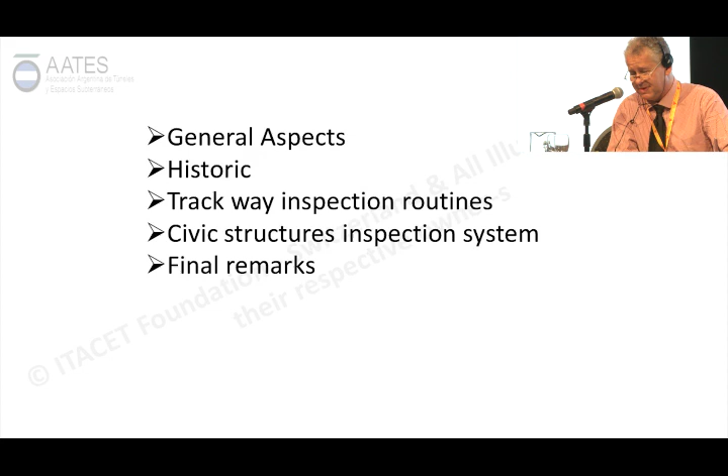I speak about lines of Metro São Paulo. I will speak about general aspects, the history of our development of projects, trackway inspection routines used in São Paulo Metro, the civil structures inspection system, and final remarks.

The subway line enterprise is very complex and comprehends the conception, design, construction, operation, maintenance, recovery. And economic evaluation and the global cost is very important along the life of the line. In construction phase, the decisions will have a big impact in the operation phase.

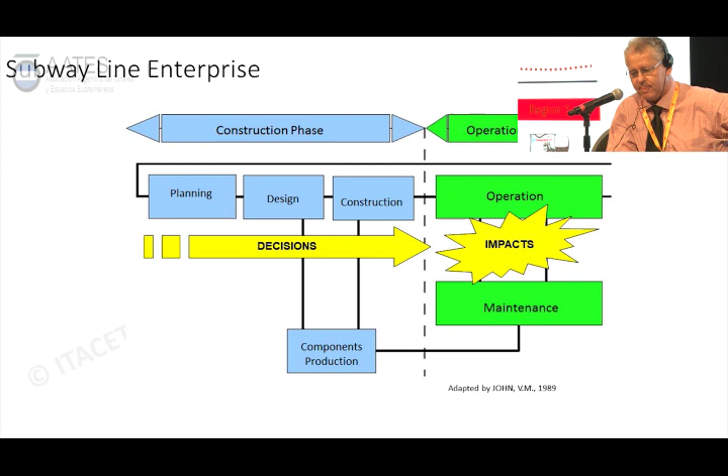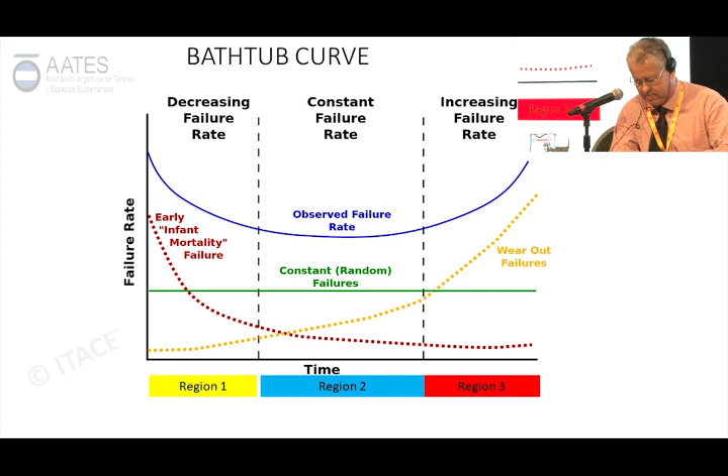This picture shows a study by Amberg from Switzerland, indicating the main problems in tunnels are humidity and water entry along the life. This statistical analysis of pathologies covered a lot of tunnels, 1,710 kilometers in Switzerland, indicating the main problems related to humidity and water entry.

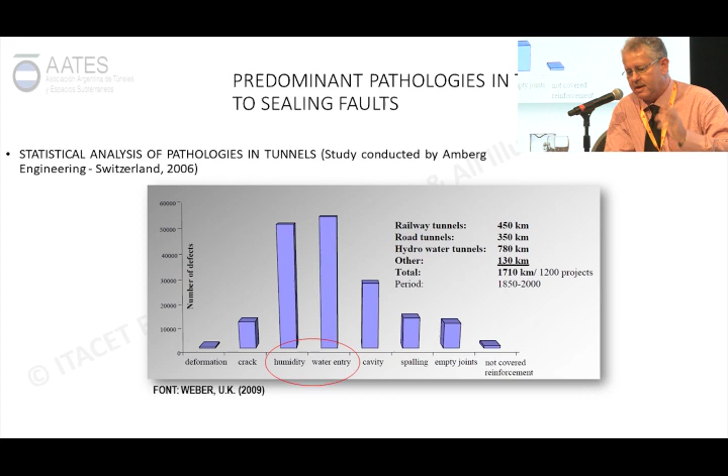In São Paulo, we have now 5 lines in operation. We have line 4, but line 4 now is privatized, and we don't have data about the maintenance of this line. But line 1 began operation in 1974, we have 50 years, more or less, of operation, 23 stations. Line 2 has operated since 1991, line 3 since 1979, and line 5 since 2002.

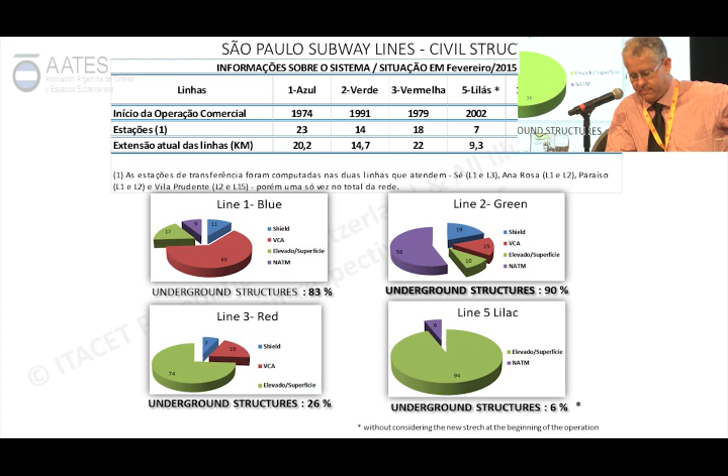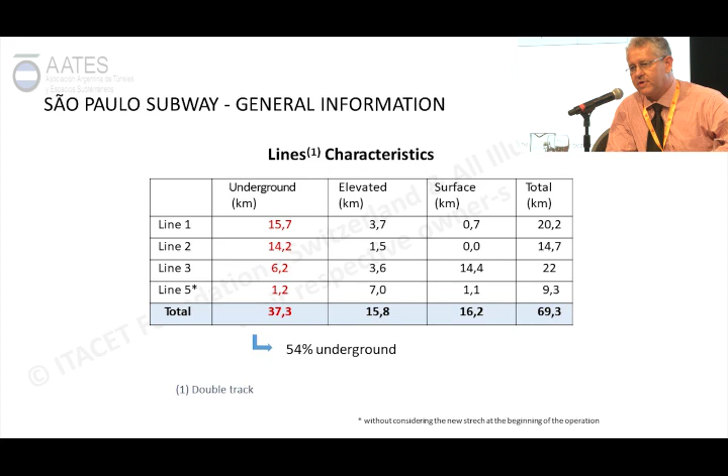Most of the lines are underground, in tunnel or cut and cover. This picture shows the underground stretch: line 1, 16 kilometers, line 2, 14 kilometers, line 3, 6 kilometers, line 5, 1.2 kilometers. We are now beginning the operation of all of line 5, but we don't have new data. And 54% of the lines are underground.

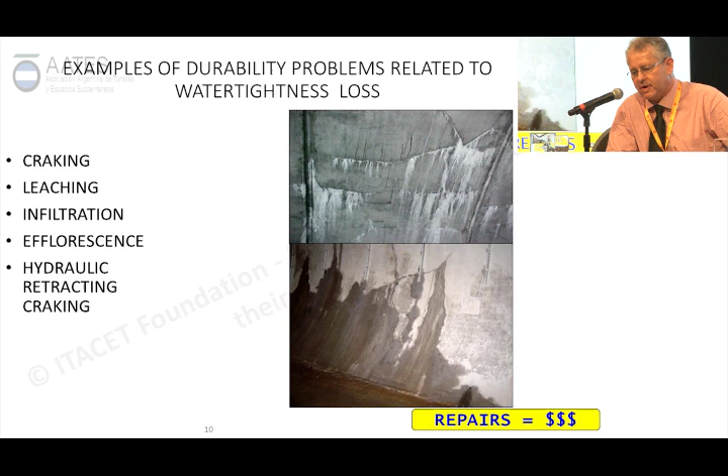But we have a lot of examples of problems of durability, especially related to watertightness or loss of watertightness. Cracking, leaching, infiltrations, efflorescence, hydraulic retraction, damaging of electrical and mechanical equipment, damage in the tray, damage in track and fixations, false occupation.

False occupation is a very serious problem in lines of São Paulo Metro, because we are transporting 4 million people a day. If one train stops the operation, we have a lot of problems on platforms, on the stairs, and others. And if water stays on the track, our system indicates a train stopped in this position, a false occupation. We call this situation the ghost train.

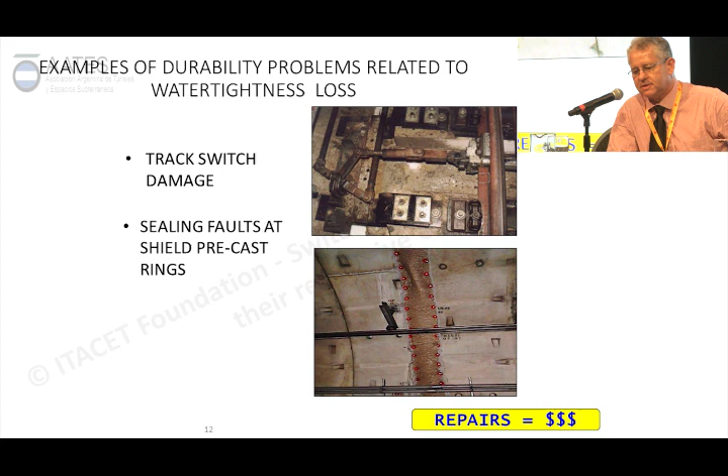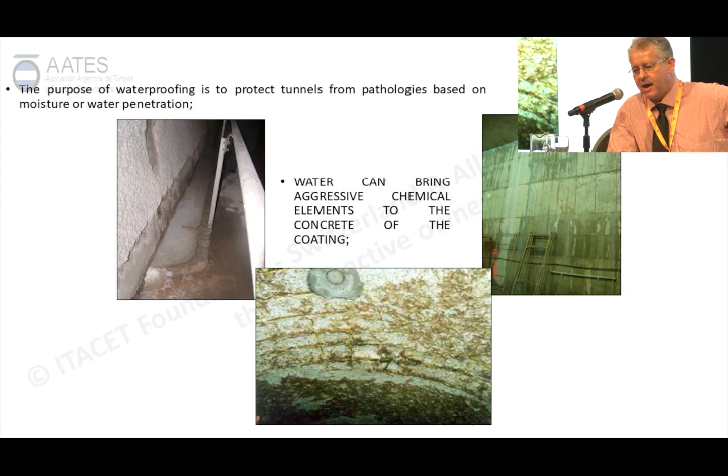Other problems: track switch damages, problems of sealing at the shield precast rings, environmental problems, problems of health, fungi, paint, sensory discomfort of users, aesthetic aspects, and others, aggressive water in concrete, chemical attack in structures.

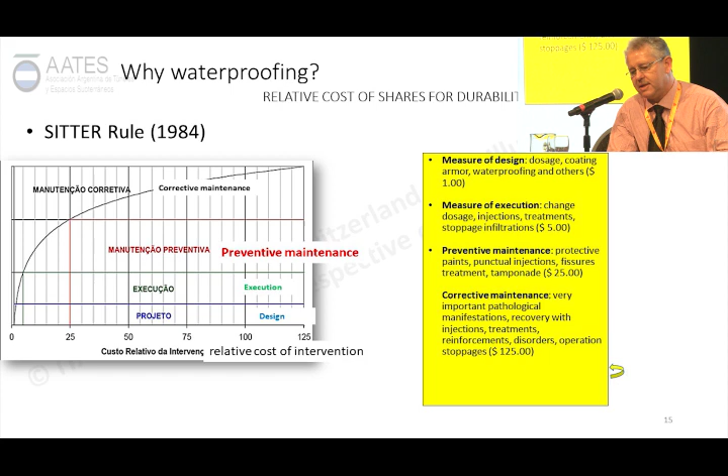And we have in mind now Sitter's rule. Sitter's rule says if you use one money in the design period, you can avoid using 5 monies in execution, or 25 monies in maintenance, or 125 monies in corrective maintenance. From this point of view, it's better to use money in the design period or execution, because in the end of the life of the tunnel, we will spend a lot of money.

This is one example of maintenance costs. In these cases, line 2, line 3, line 5, over 7 years: 15,000 liters of preparation and injection of special polyurethane resin for temporary sealing. Preparation and injection of polyurethane resin for final sealing, 43,000 liters, very, very expensive. Preparation and injection of polymeric acrylic gel, 30,000 liters. These costs are paid by the user, not by the construction.

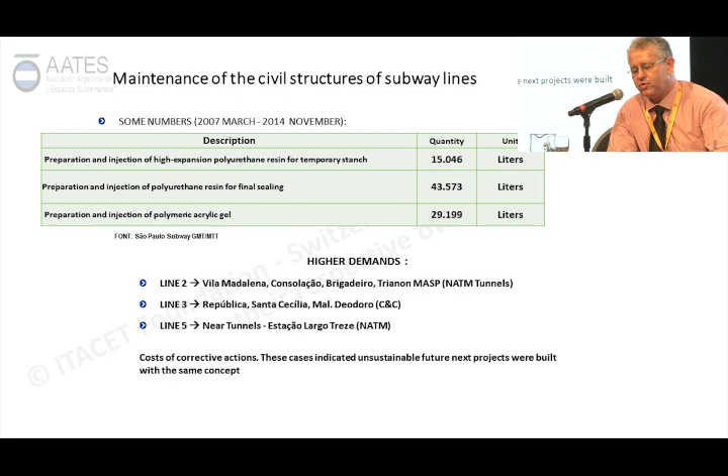We now prefer to spend money in design so as not to be in this situation. This is the graphic by Mehta. Mehta is a very important concrete specialist. This graphic indicates the problems in the concrete life, the problems with water in cracks, loss of mass of the concrete, problems in the reinforcement, corrosion.

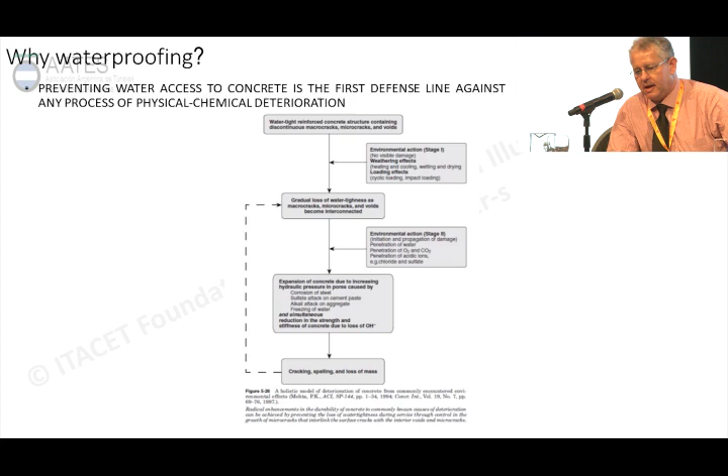And the cost of waterproofing to prevent this kind of problems in São Paulo today is this order of money. In line 5, the waterproofing is 8.7% of the cost of concrete, all the concrete of the line. And waterproofing related to all the work of the line, 3.8%. And in line 2, the waterproofing cost 7.1% related to concrete, and 2.8% related to all the work.

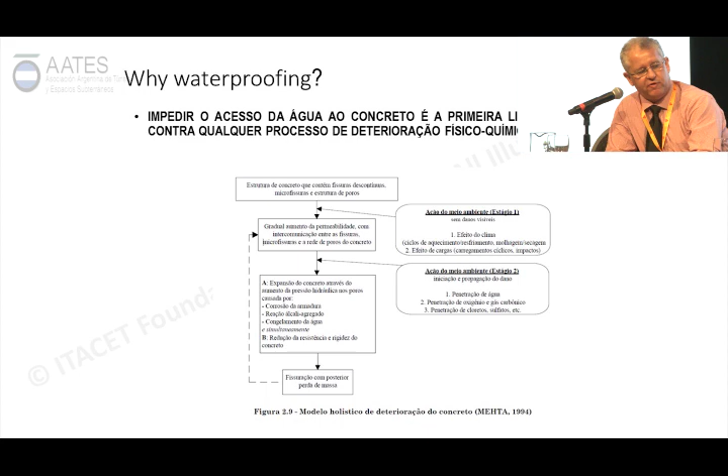If you have in mind Sitter's rule, this is 1 to 5. If we don't use this philosophy in the project, we will use 5 times more in maintenance or recuperation of the lines.

The problems of waterproofing in the world: our data indicate the first uses in the 60s using reinforced fiberglass, and flexible membranes were used in polypropylene textiles and polymers in Switzerland and Austria. And in 1983, NATM in Washington, using flexible membrane with a big success. And after this, a lot of works around the world are using flexible membranes.

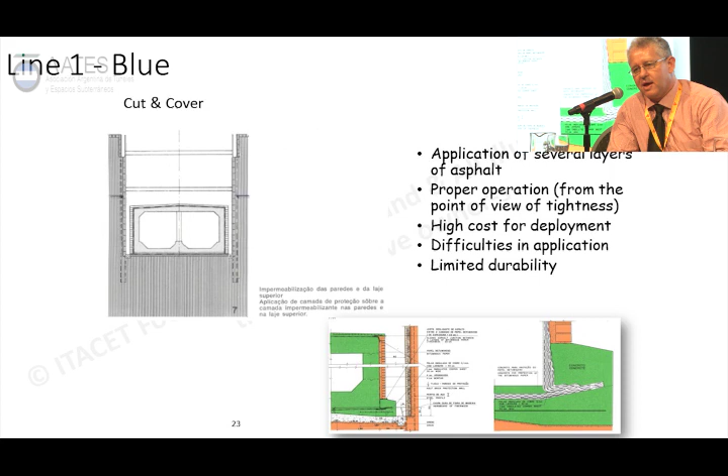But in São Paulo, our waterproofing systems in lines, the first line in the 70s, we used only layers of asphalt. A big 7 layers, asphalt, geotextile, asphalt, geotextile, high cost of deployment, difficulties of application, limited durability. These pictures indicate the sequence of construction of waterproofing in line 1. The success of this option is not very good because a lot of these tunnels are under the water table. It's difficult to indicate this is a good solution. And around the world it is now a very old solution.

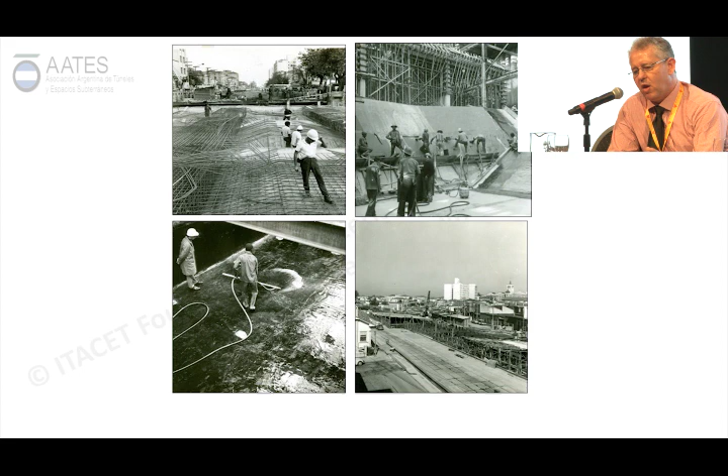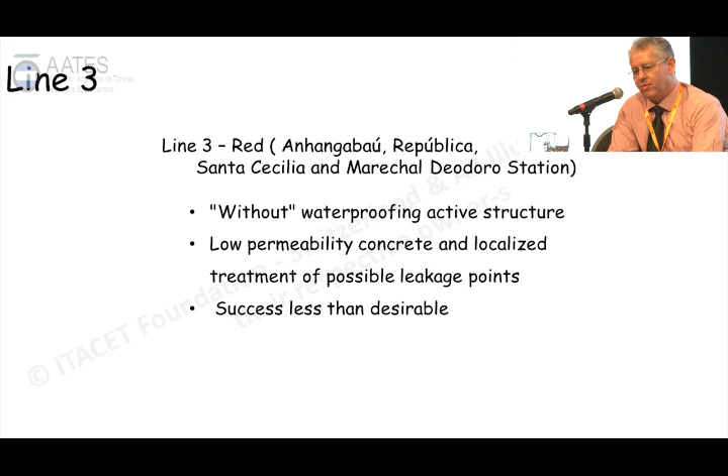Application very, very difficult. In the 80s, in line 3, a new philosophy in São Paulo Metro, low permeability concrete. In this case, used in stations Anhangabaú, República, Santa Cecília, Marechal, and the others, without waterproofing, active structure, low permeability concrete, and localized treatment of possible leakage points. Success less than desirable. A lot of problems.

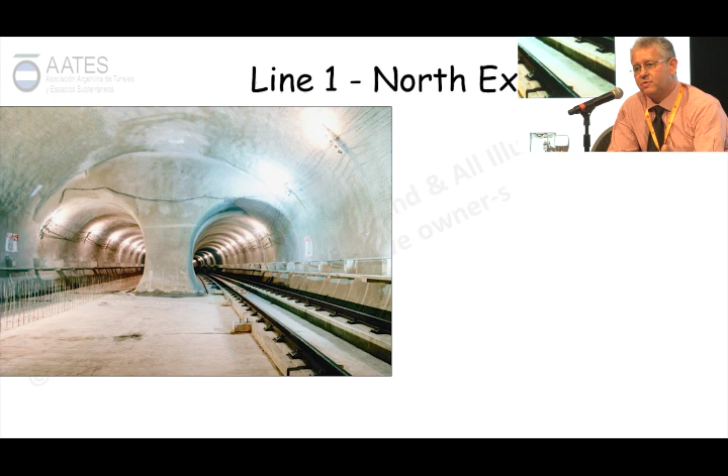In Marechal Deodoro Station, this tunnel is an NATM tunnel with 2 shotcrete layers and without waterproofing. Partial success in these conditions, because in this tunnel the mass is a very good clay without water. But in other stretches, a lot of water in the tunnel. One important view of this option is that we construct with low permeability concrete. The concrete is impermeable between the cracks. That is the important thing. In the cracks, the water flows into the tunnel. Impossible in our situation, our technology.

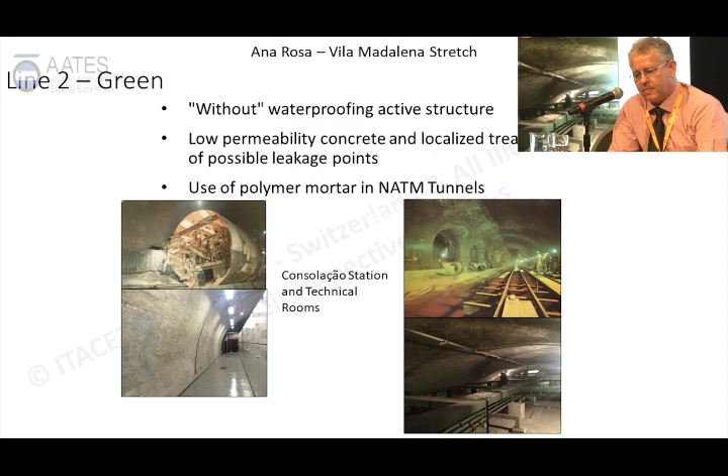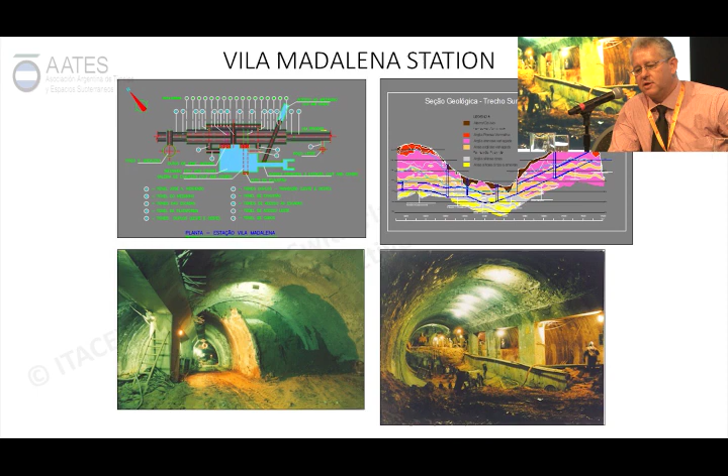But the climax of the bad situation of waterproofing was in Vila Madalena Station. Vila Madalena Station was constructed by the NATM method in a very variable geology with layers of sandy clay, in the top right of the picture, and 3 different levels of water table. Like now, we had a lot of stopped works. This tunnel was stopped for 6 years with a big shaft connecting all the water tables. And the construction of this station was without waterproofing, using low permeability concrete.

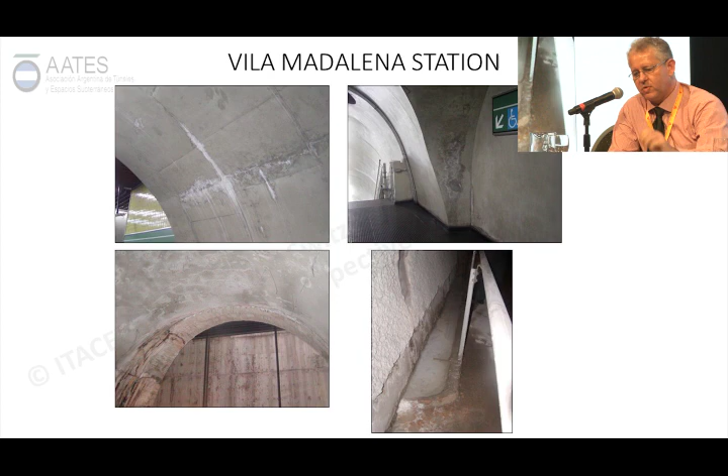A lot of problems. We had problems with the public ministry, processes in justice, a lot. Serious problems of leakage and others. In the picture you can see a lot of situations. The pathologies: infiltration in retraction cracks and thermal cracks, infiltration in concrete joints, infiltration in concrete failures, nests and voids, the dissolution by hydrocarbon of asphaltic membrane in contact with line 1.

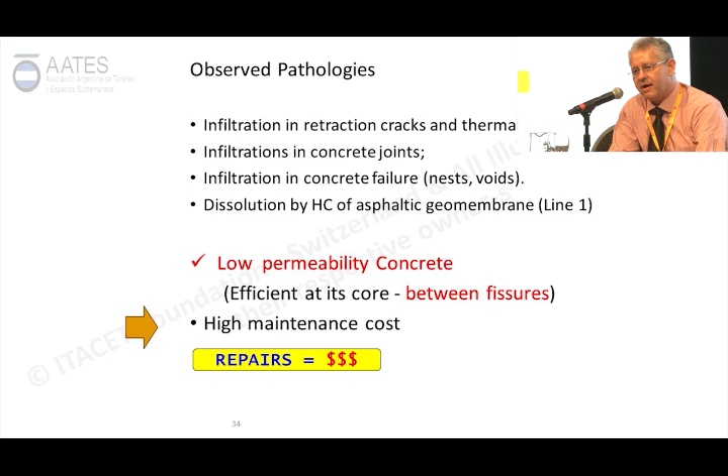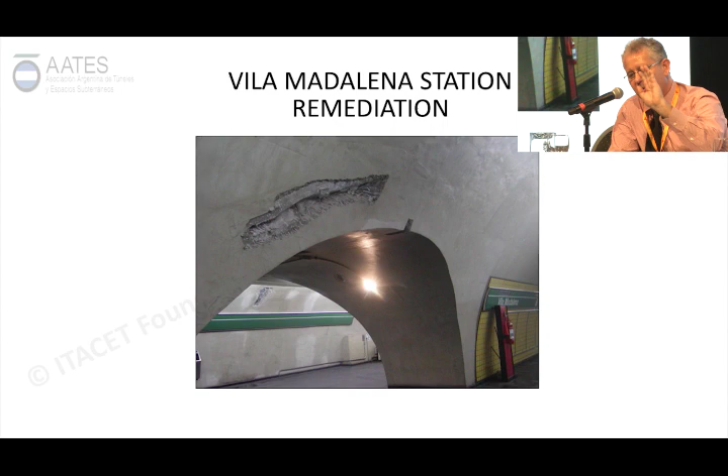In summary, low permeability concrete is efficient between fissures, and the repairs are very, very expensive. This is a repair of the Vila Madalena station. It's similar to an odontological situation. You need to open your tooth and use polymeric mass. This is the situation. But after the problem, we had a good situation, but every year new cracks are showing.

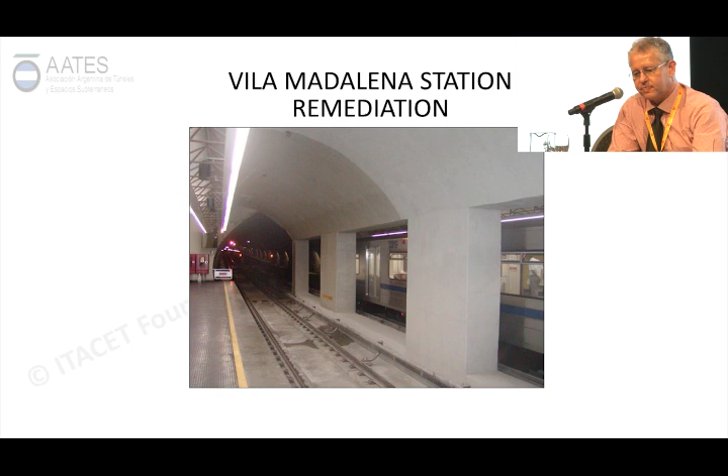In the 2000s, we changed the ideas. Now we are using waterproofing. This is the first use of waterproofing. In this period, the indication is SIA 280.

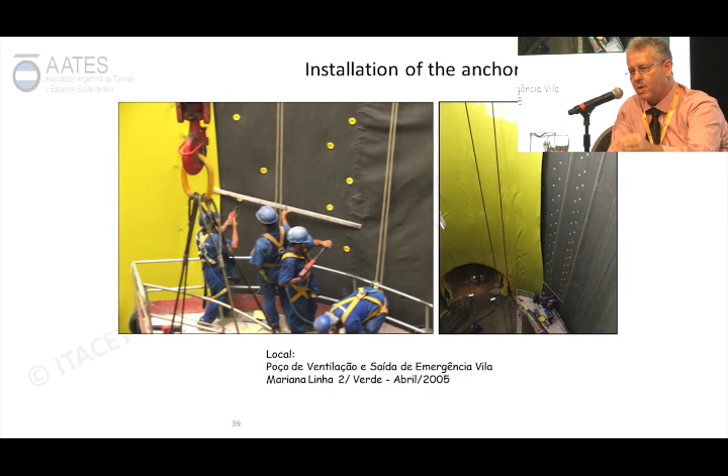218, Switzerland norm. This shaft was waterproofed by a group from Switzerland, the first utilization of this. This is a shaft with PVC membrane, 2 millimeters, using water bars, double welding, testing the depression in the welding.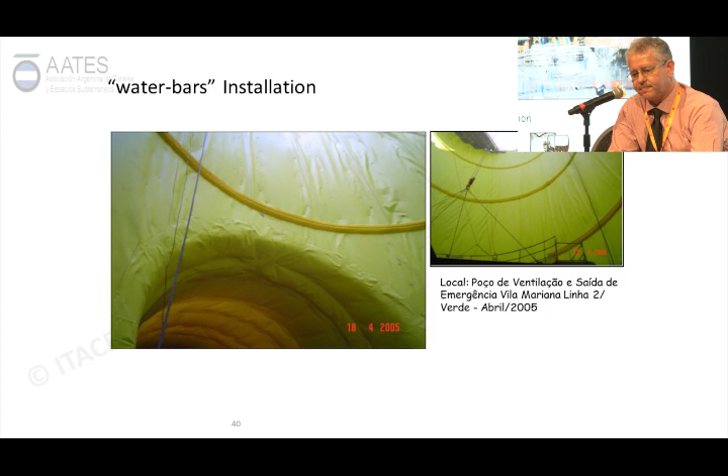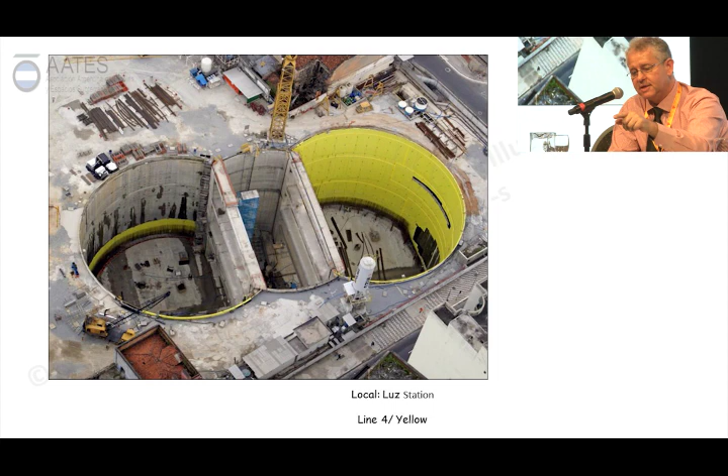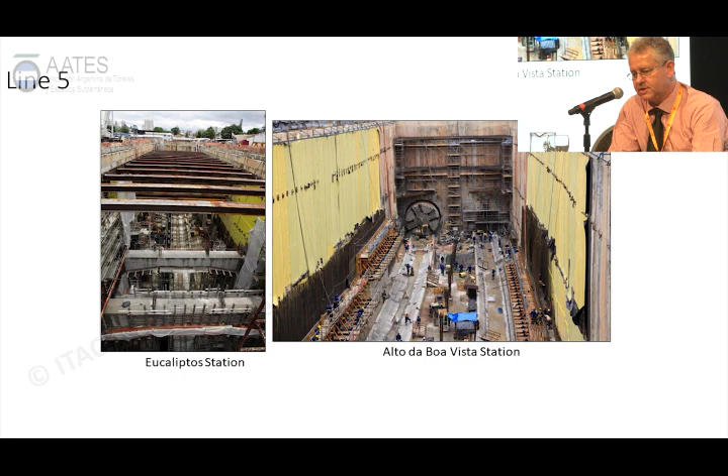This is station Luz, line 4, all sandy, without one part of clay. Water, we had 70 wells through dewatering to construct the station, and use, in this case, 3 millimeters PVC membrane. Now, in line 5, we are using, in all projects, PVC membrane. This is line 5, new projects.

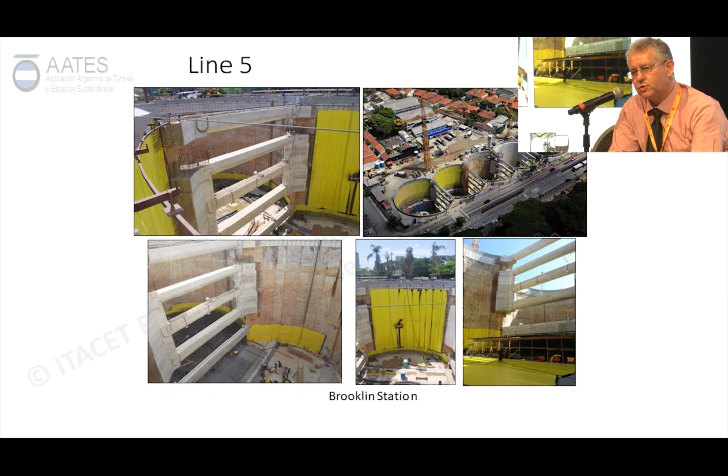The construction of station Brooklin. This station is a special station for us because it's an application of 5 shafts. Constructed at the same time, all the shafts using diaphragm walls and hydrofraise in this case.

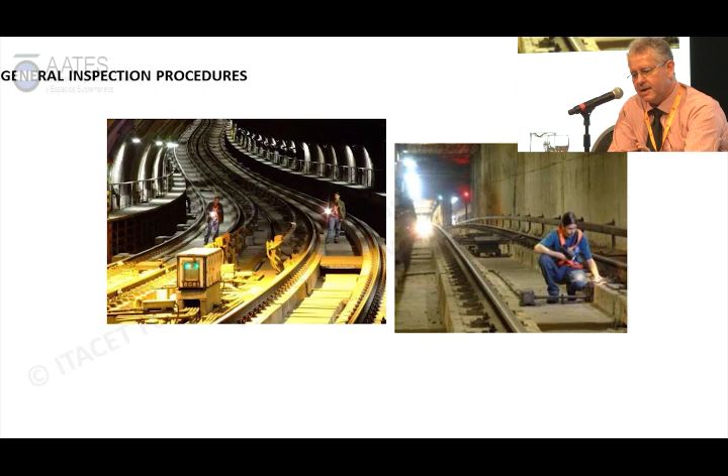But in the phase of the operation, because our company constructs and operates the lines, we have very specific procedures for inspection. I had help from the maintenance group of the metro. And the maintenance, a lot of things. One, track.

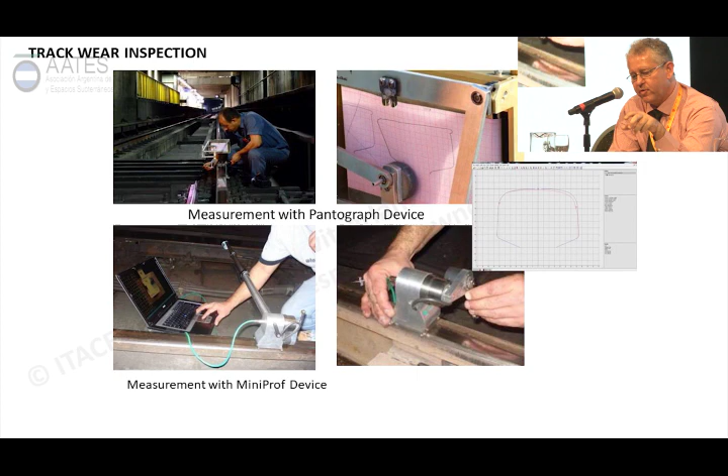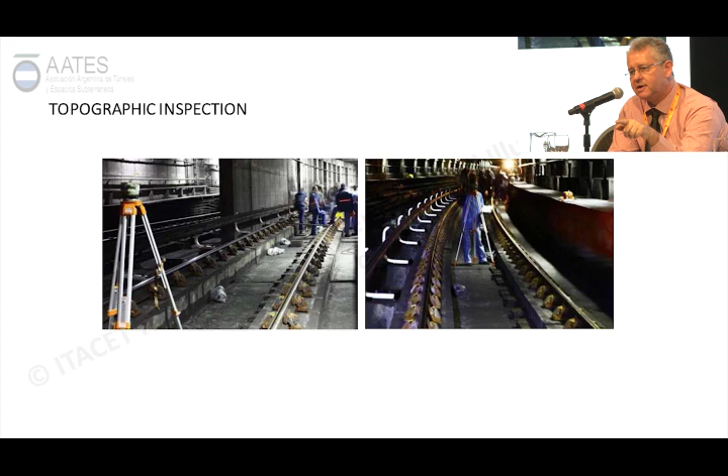Systematic inspection in tracks. The wear of the tracks, using pantograph system, measure with MiniProf device, topographic inspection in all the lines, in special lines where we are constructing new tunnels under the lines. Leakage current inspection is a serious problem. We had problems in corroded fixations, and in the buildings around it. If we have a lot of leakage current, we had problems around our line.

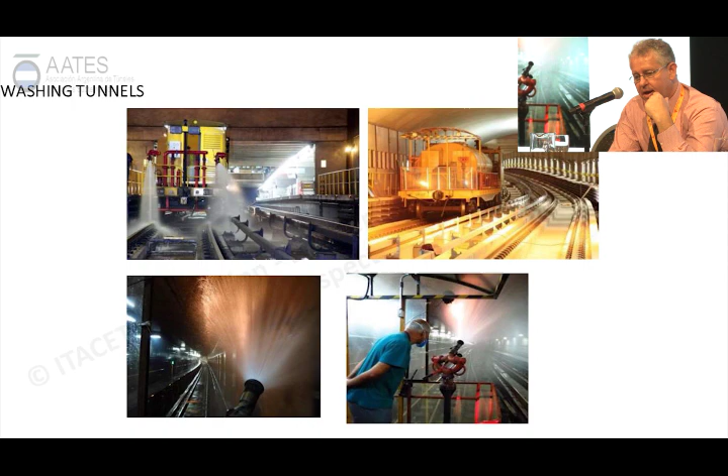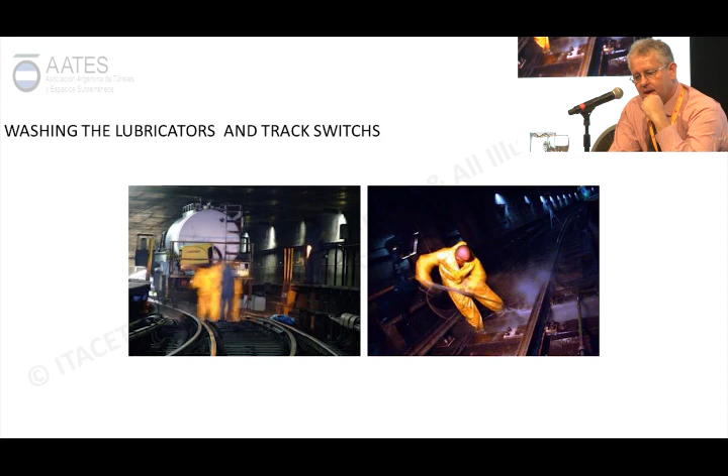Ultrasonic inspection in tracks, general inspection and cleaning, washing the tunnels using underground water, where in the old lines we have points with a lot of water. We are using this water for washing the tunnels. Lubricators in the track switches, track lubricators, systematic inspections, grinding rails in all the lines periodically, and in some special points we have problems in the rails. In this case, we change the rails and grind the rails.

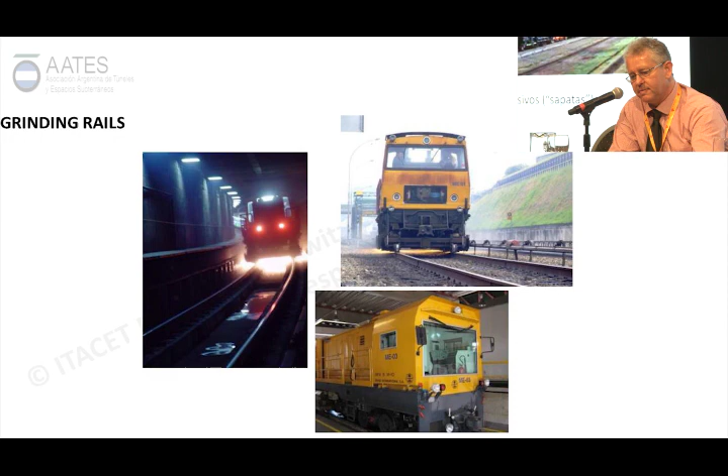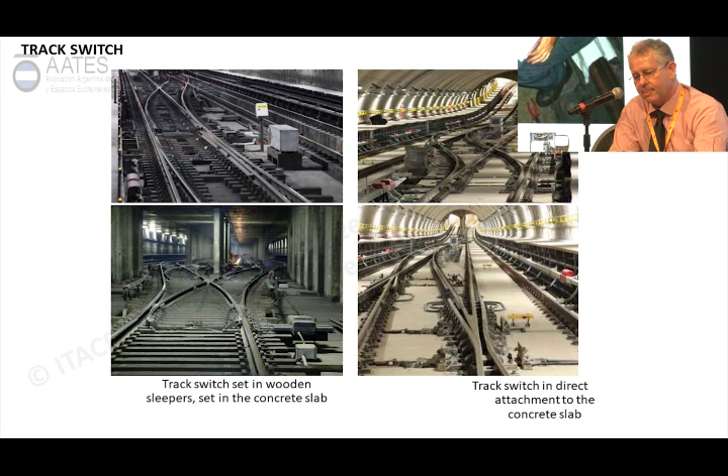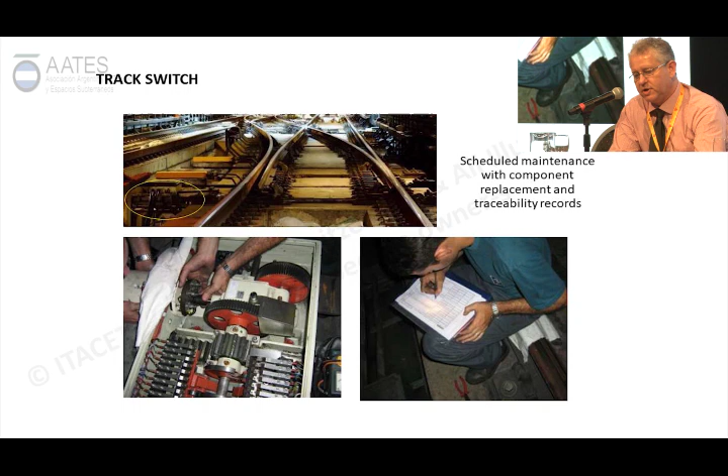Track switches, we have track switches in wooden sleepers or directly on concrete. Now we are changing all the wooden sleepers to concrete sleepers. But it is a very important point to maintain. Scheduled maintenance with component replacement and traceability records, especially in the track switches. Special systematic inspection of track switches and monitoring of track switches.

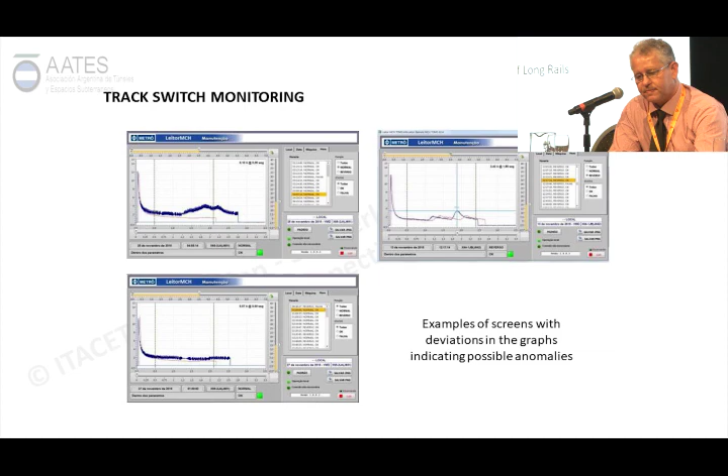All this monitoring is very important because if one train stopped in the platform with 2,000 people, it's chaos in São Paulo, chaos. Welding rails using fusion, changing rails, transport of the rails in the tunnels, rails exchange, aluminothermic welding.

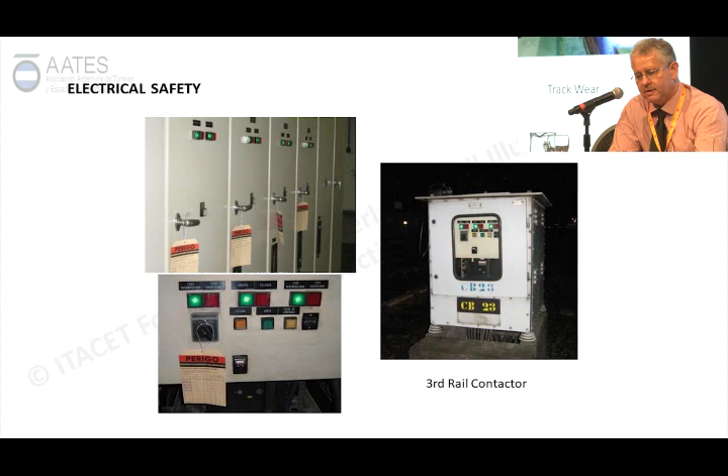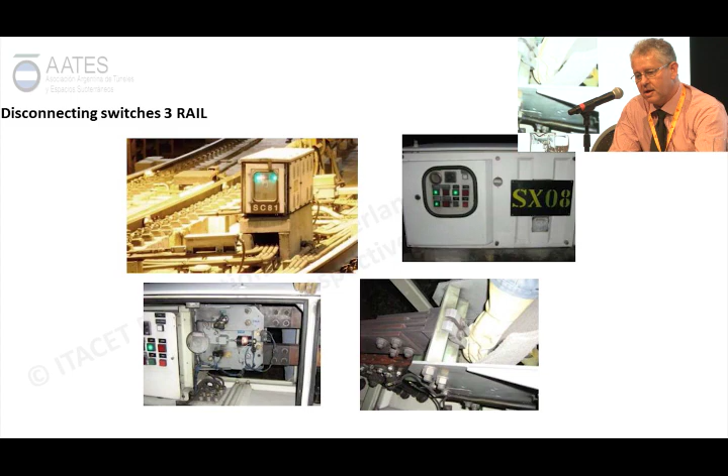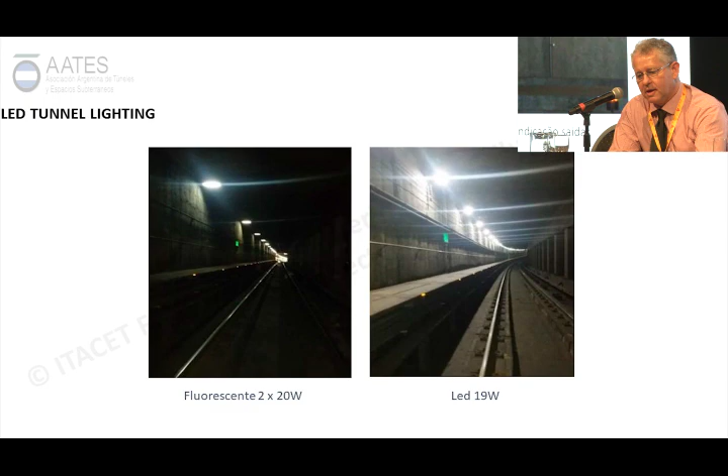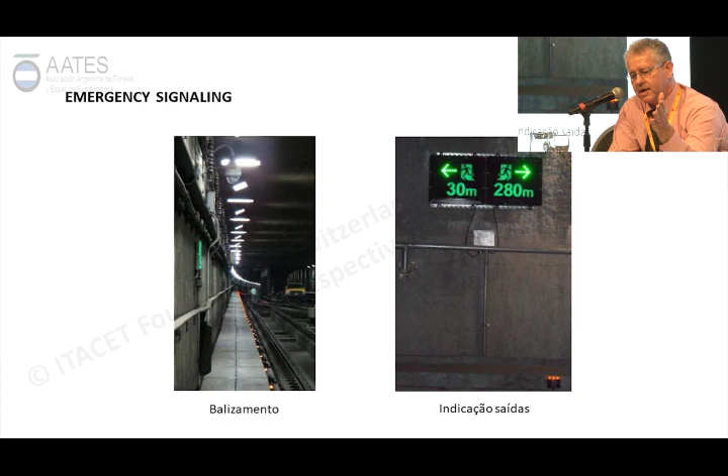Electrical safety, inspection of the third rail of electrical supply, disconnect switch of the third rail, lamps of maintenance in the tunnel. Now we are changing all the lamps to LED, lighting in LED. We have emergency signaling in all the tunnels, indicating the emergency exit and the marking of the tracks. Emergency signaling.

It's a very important point for us, noise vibration attenuation. The first problem we had was in MASP, Museu de Arte de São Paulo, because the trains induced a vibration in the concert room of the museum. During a chamber concert with violoncello, the vibration of the train. Beginning with this situation, we needed to change all the fixation systems where needed.

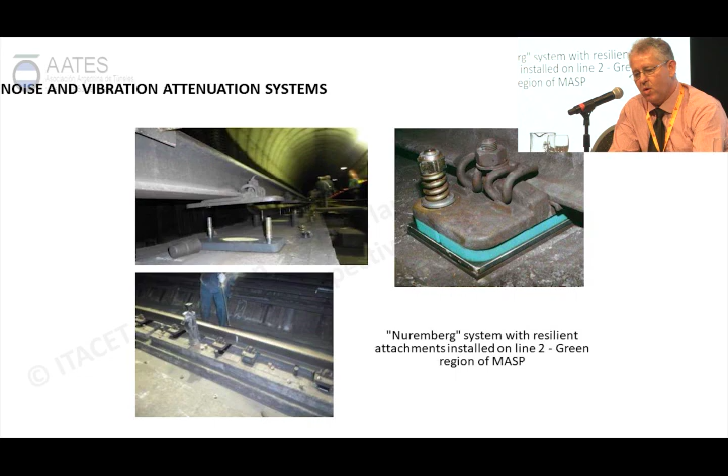This is a special kind of noise vibration fixation. It's a mass spring system with helical springs. It's called isodampers. This is for frequency 5 Hertz. It's the most expensive and is the best system for noise vibration.

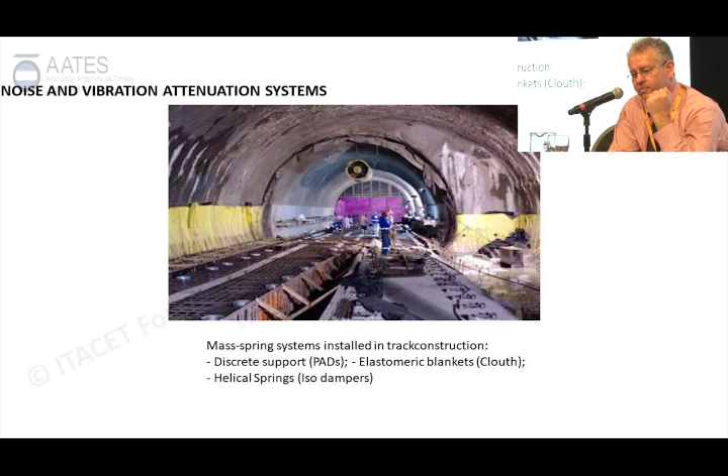The structural reliability of São Paulo Metro: the subway facility must present a level of structural reliability compatible with network operation responsibility. The main basic prioritization must always be the minimization of structural problems, detected by visual inspection, which may compromise the stability of the installations, the good efficiency of the equipment, and above all, the safety and physical integrity of users and the employees of the subway.

In summary, the basic prioritization of the civil maintenance service related to operation basically refers to: guarantee of full operation of the trackway, operation of the network without affecting the so-called carousel, the São Paulo Metro operating carousel, the integrated flow of the train operating network, continuous power supply of the metro network, ensuring full and sufficient signaling during the commercial operation, guarantee of operation of the user access system, box office, collection, and the locks.

This is the flux of the inspection in the trackways and the structure of the tunnels. This maintenance is civil maintenance, only in finishing elements, structures, corrective maintenance, infiltration treatments, failure of waterproofing, and anomalies in concrete.

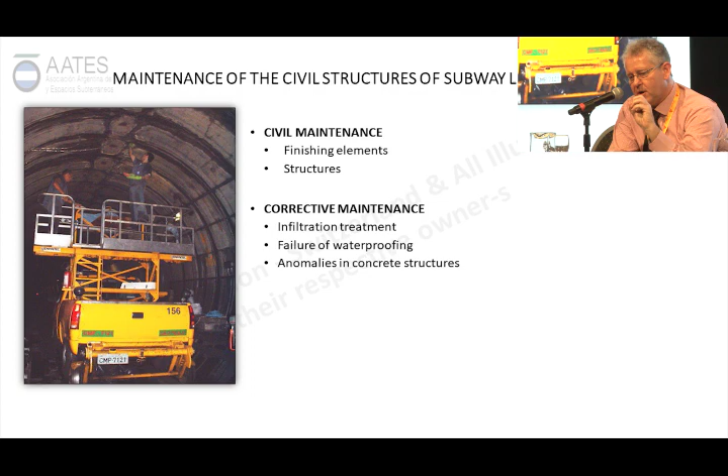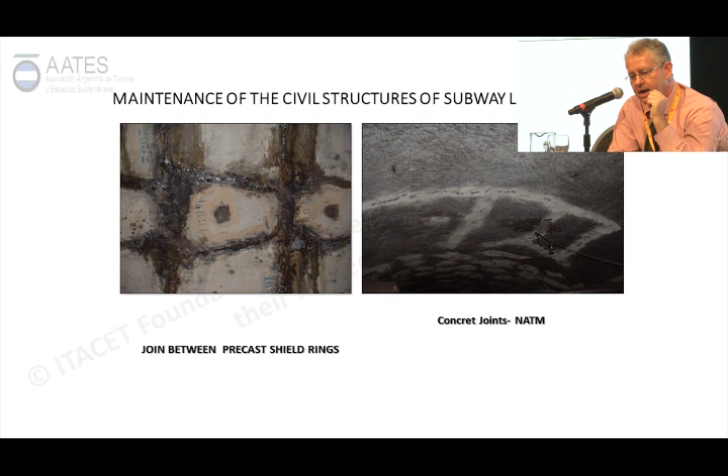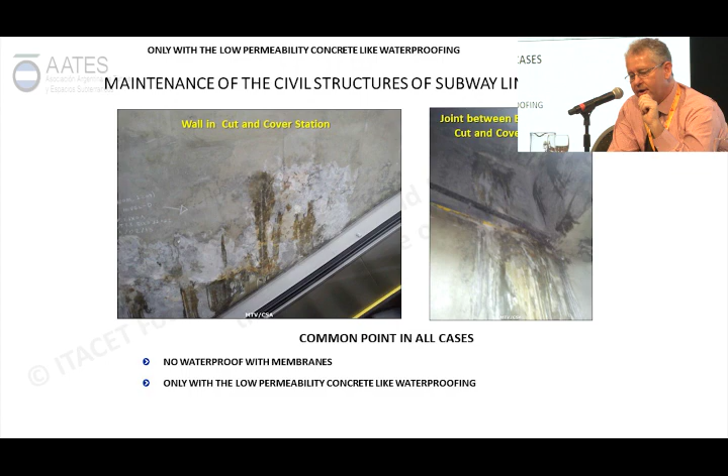We have the track vehicles to promote this maintenance. The cracks, concrete borders, joints of rings, concrete joints in NATM, problems in walls in cut and cover stations, joints beam wall in cut and cover stations. Common point of all these problems: no waterproofing with membrane in these cases, only with low permeability concrete as waterproofing.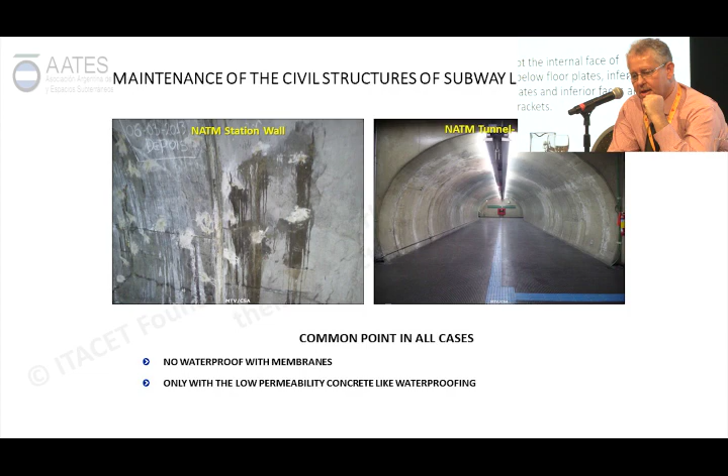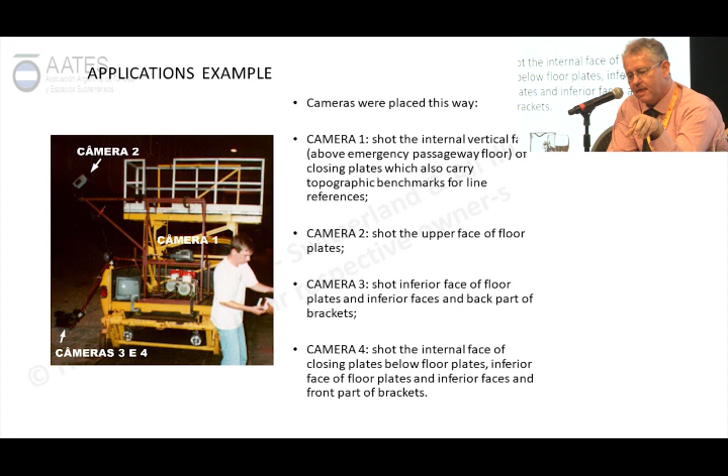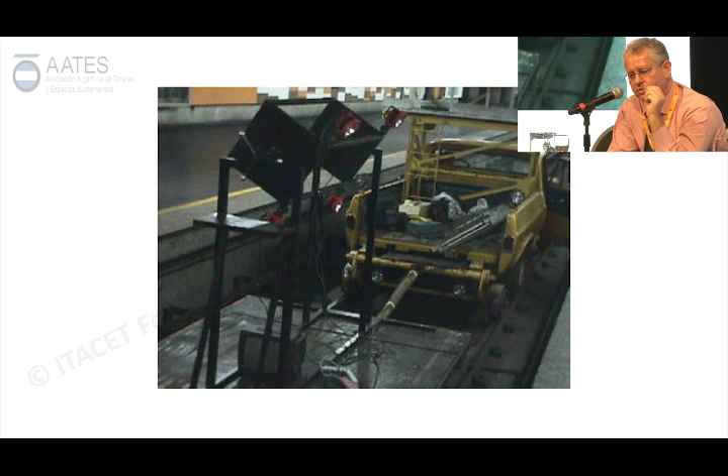NATM wall, NATM station, the same problems. We developed a system to study and hierarchize the problems using cameras in vehicles, in tracks, filming all the structures, the tracks, the walls, the tunnels.

And it was filmed, and we create a special sheet. This case is sheet of the emergency way. All emergency way is precast concrete. And we have tunnels with 40 years, and we need to inspect all the plates, all the plates.

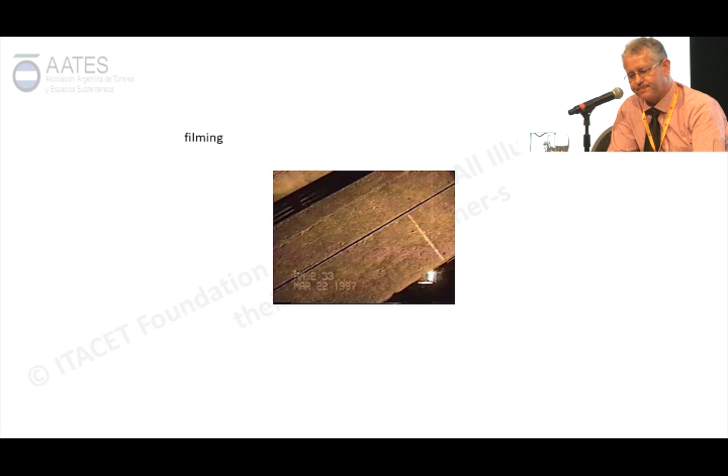We using filming, and after this, classificate kinds of plates with problems: big problems, small problems, and or changing the plates. In this case, infiltration in the superior photo and photo without problems down.

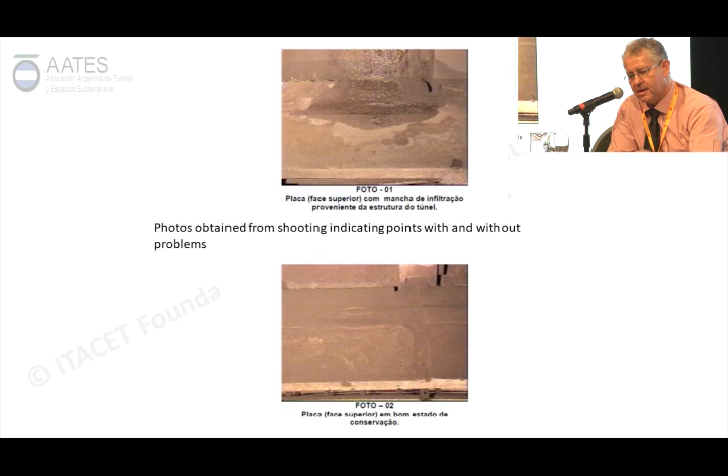The following figure shows the result of the evaluation of the conservation status through the assessment of notes of the steps in the decision-making process of maintenance floor plates. It's an example of emergency way, and the surface of the elevated tracks of subway, floor plate surface, walls, and highways.

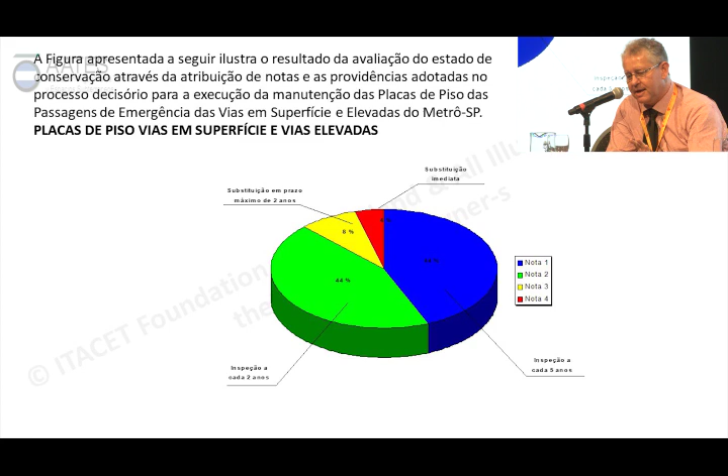The finding of this study indicated part of the plates need inspection in less than 5 years, other part inspection in 2 years. Substitution of 8% of the plates in 2 years, and 4% immediate substitution.

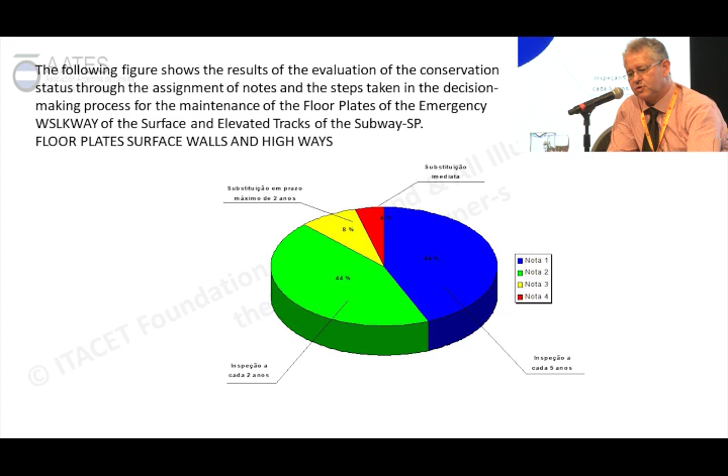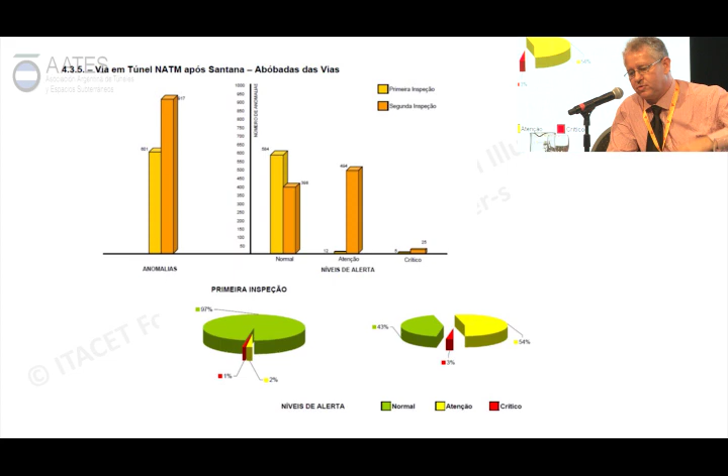90%, 97% normal in first inspection. In second inspection, normal 43%. The problems are growing during the years.

The resume of this, the abstract of this, is in stations. For example, Station Santana is an elevated station, Carandiru elevated, Tietê, and the others.

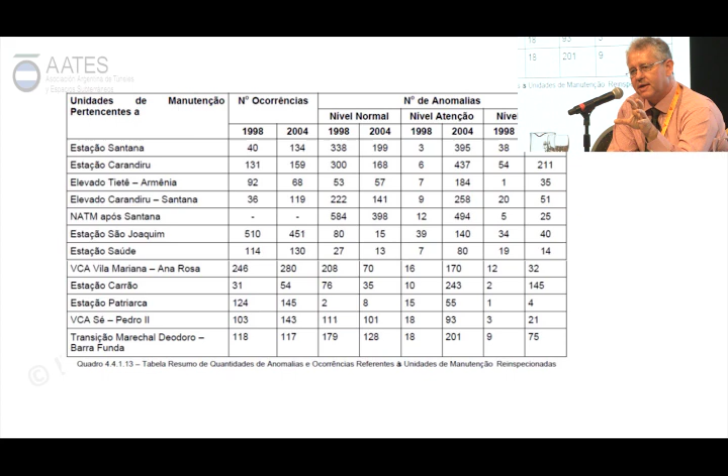The main problem is the stations elevated or at level, we have more problems than underground stations because the rain, the acid attack of the rain, the atmospheric attacks. More or less 20% of the problems was in underground structure, but 80% of the problems is in level or elevated structures.

Conclusion of this study: in view of all the situations investigated, it is noted that some structures present deterioration process more accelerated than others. The structures exposed directly to the action of weathering and mainly rainwater present great evolution of the quantity.

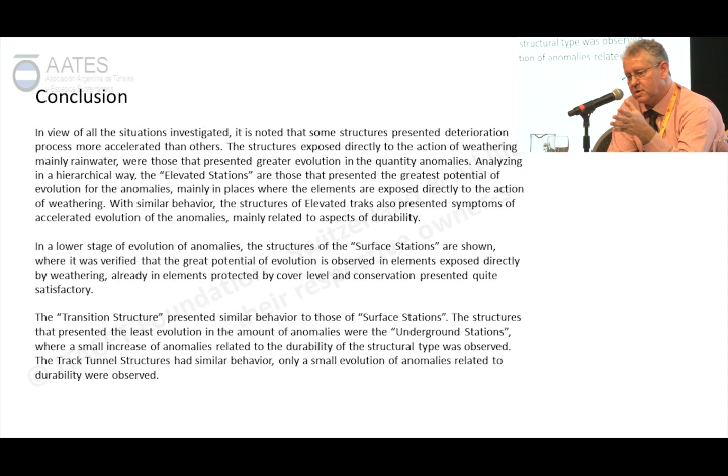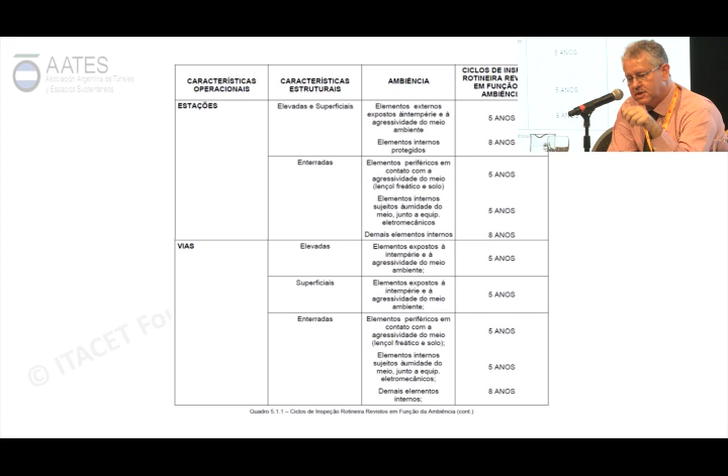In abstract, this table indicates stations, elevated, underground, surfaces, and cycles of inspection necessary after the system of control. Cycles of inspection of routine, in some cases 5 years, 8 years, depends on the kind of structure.

Closing inspection line 5 and 2, we used waterproofing in all stretch of tunnels. Our design action, I mean a durability of 100 years, and returning to the Sitter rule. If we are using one in design phase, we...

We use 125 in the maintenance phase.

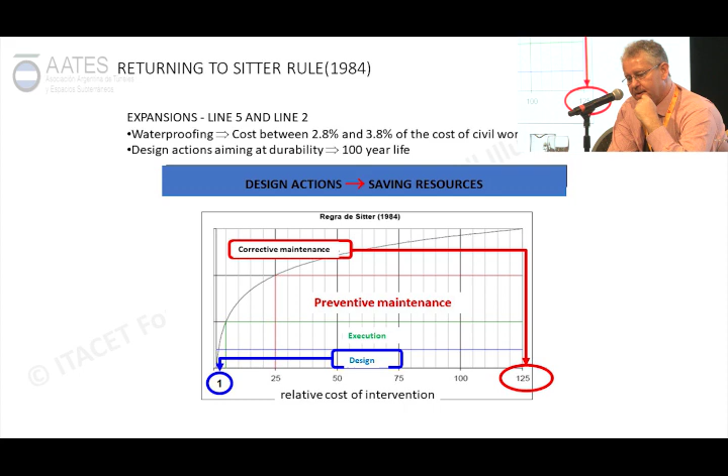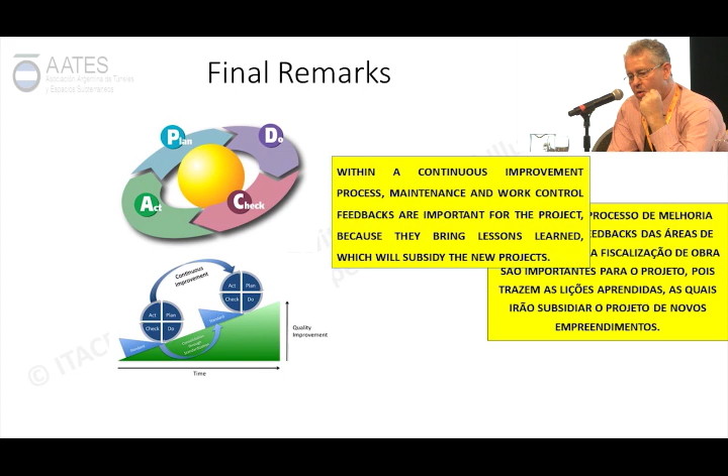Using the PDCA, I think all people know this graphic, within a continuous improvement process, maintenance and work control feedbacks are important for the project because they bring lessons learned, which will subsidize the new projects.

Considering that the subway line development do not finish at the delivery of the work, but continues in the operation phase, there should be thought in structures and their respective waterproofing system with the less cost of maintenance through the life of the system, overall operating cost of the line. This is important if we consider a system management with resources of public administration.

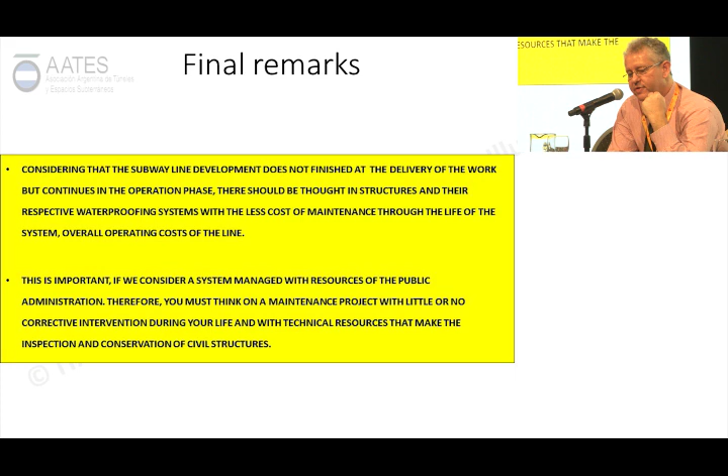Therefore, you must think of a maintenance project with little or no corrective intervention during its life and with technical resources that make the inspection and conservation of the civil structure. One indicates bibliography.